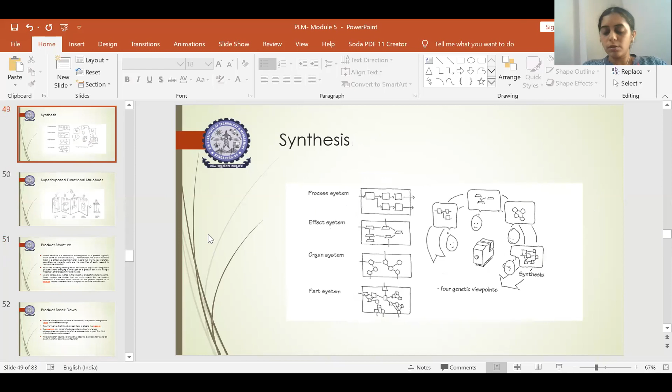In the last few sessions we dealt with structures, so I don't want to repeat all those. There were 4 types of structures we dealt with, with respect to the basic structure, synthesis, and function structures. We also dealt with what you mean by product structure, and how it is decomposed into different levels, which I explained in the last class.

Now all these will be focused on our product structure views. So what do you mean by product structure views? Product structure views are made upon several activity domains within the company. Within the company, each product you're going to manufacture will have different sectors, and every sector will be viewed and projected properly to see that it's working.

Due to the fact that not everyone in the company has to have a detailed overview of the product, several components with their attributes can be extracted. When it is a big company, many products will be going on, and not all people will have the entire information related to how the product is going on, how it has been performed, and how it has been operating.

This product structure view will give us the entire information regarding the product structure, what its structures are, how it is going to be synthesized, which materials are selected, which type of operations you're performing to get the parts, how it is assembled, where it is assembled, and inspecting the inventory and other workshop facilities, whether it is running, whether equipment is down, and so on.

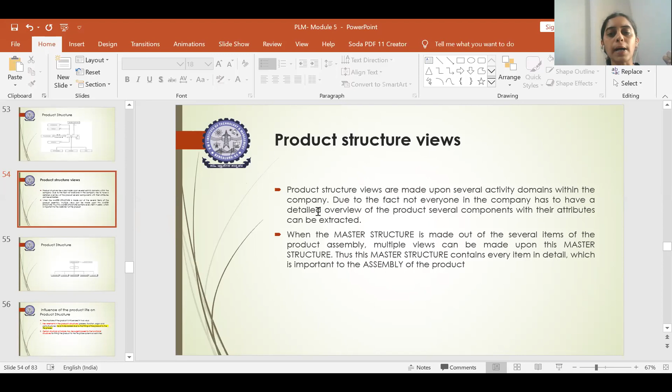For that purpose, the product structure will be bifurcated into many segregations. We call that the master structure, and that will be decomposed into different sectors. So you can see this is the master structure.

This master structure will provide the entire description of the structure of a product. It will be viewed into different sectors: the service sector, the design sector, the manufacturing unit, the purchasing unit, and the sale unit.

In everything, the product definition plays a vital role. Based on the product you are defining will be your project goal. Based on the project goal, product definition will be done. The goal is nothing but the need of the customer, and based on that need, the product definition will be done.

Based on that, the master structure will be developed, which will have all the substructures I explained to you: the basic structure, the organ structure, the synthesis structure, and the functional structure. Clubbing all those together provides us the master structure.

But clubbing all those together will not provide the entire description for the customer or layman who is seeing that structure. So it has to be bifurcated and projected in some way, and hence we call that a product structure view.

This view will provide us the entire clear picture about the product right from the initial to the end, that is, how good the serviceability of the product is. This will provide the entire description.

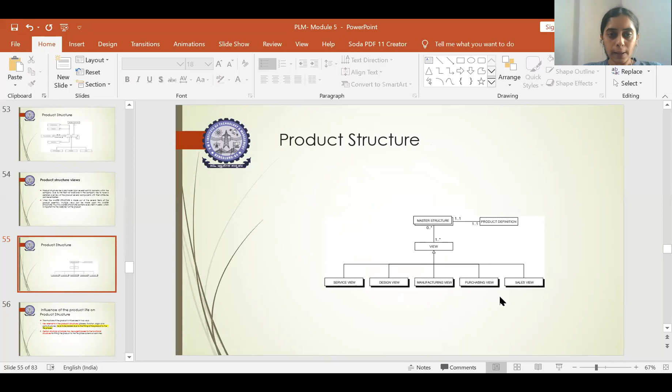So next is influence of the product life on the product structure. Until now, we were focusing on product structure and its view. So now you should understand how it influences its product life. Related to this, you have two ways in which it is influenced.

First, new elements in the product structure have to be added due to fitting of the product to the life phase. So if it is an existing product, and some modifications are added for the need of the customers, you're doing add-on into the existing products. You have to show which elements you are adding new. It could be some process elements, functional oriented elements, or organ structures, or specifically some parts which you are modifying, so you will have changes in the existing product as per customer requirements. This is one part in which it influences the product life of a particular structure.

Second, certain structural principles may be superimposed to the functional structures. We have discussed structural structures, organ structures, synthesis structures, and functional structures. Sometimes, some of the structural structures will be overlapping with the functional structures.

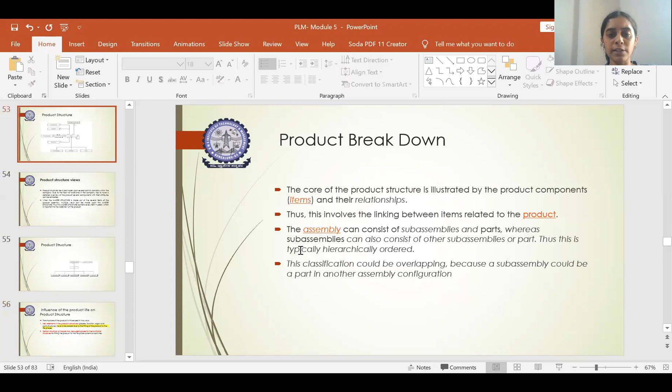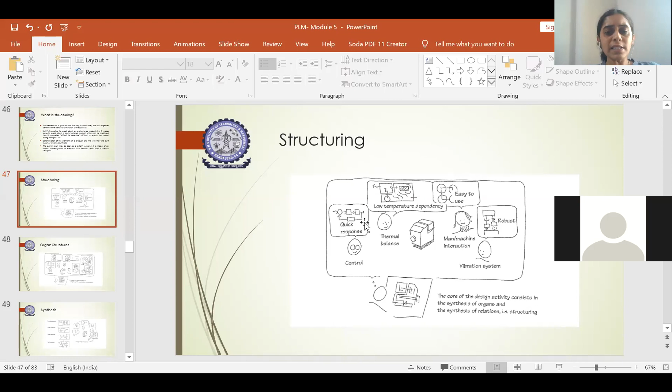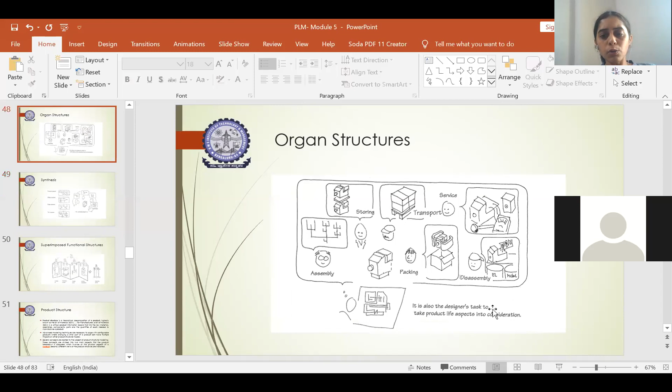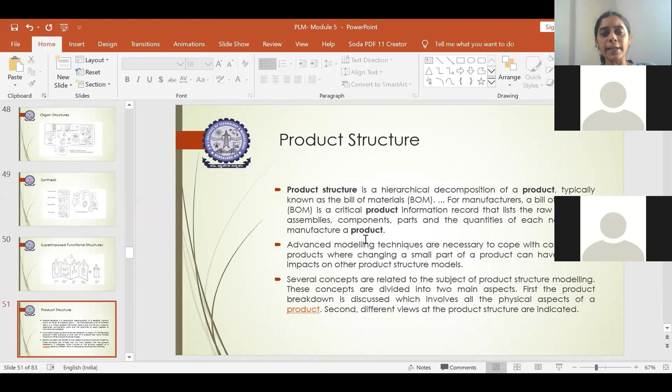So these are the two factors which affect the life cycle - one is if you are adding any new elements, and second, if the basic structural structure is being superimposed with the functional structures of a particular product. This helps to picturize the product structure view exactly, so they can identify what is being superimposed, understand this factor of structural overlap with functional structures, and identify the adding elements using the concept of product structure views. These are the two factors which influence directly our product life cycle.

When you add on elements, it helps improve the life cycle of the product, because you are modifying it when it's already in the market. This helps improve sales, turnover, and life cycle, so it affects our product life cycle. Second, when it is superimposed, if you analyze which factors are superimposed, it also helps increase the functionality of the product.

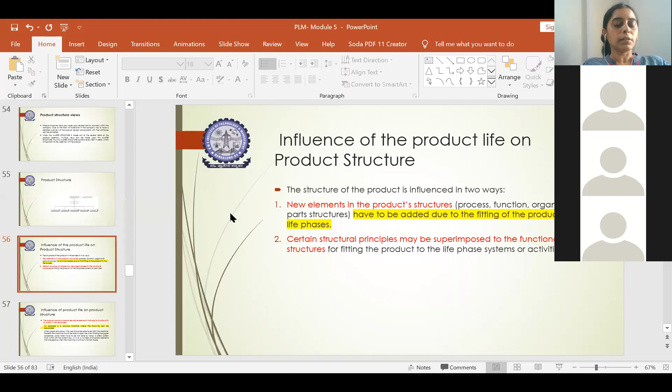I'll pass on the message related to this. Okay, you will pay for this. Wait.

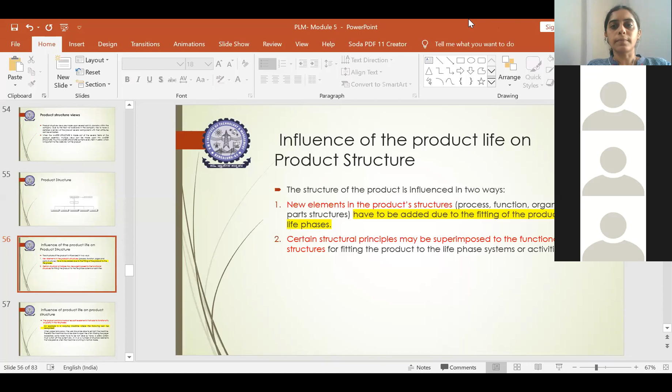So the third influence factor is that the product contains more or less active elements that add to functionality or quality in the life phase. What do you mean by it? The product contains less or more active elements, which could vary the functional aspect of a particular product or its life phase.

For example, a copying machine, or printer. Sometimes if the paper gets jammed, changes have to be made - you have to remove the cartridge, remove the paper jam, and insert it again. So this is one case where some machines, if you just give the input data, you get the output, with no more moving elements or less active elements. When there are more moving elements, like in a printer which has to move to get the printout, there will be some variations, some jerks or jams in between.

So it will be able to identify those issues. These are the third influential factor related to our product structure views, because in views, all the moving elements, all the varying active elements, everything will be pictured. When it could be jammed, everything will be segregated. So when they see a product structure view, they'll be able to identify when it can happen, and overcome the jamming of the paper sometimes. These are the three criteria which influence product structure views.

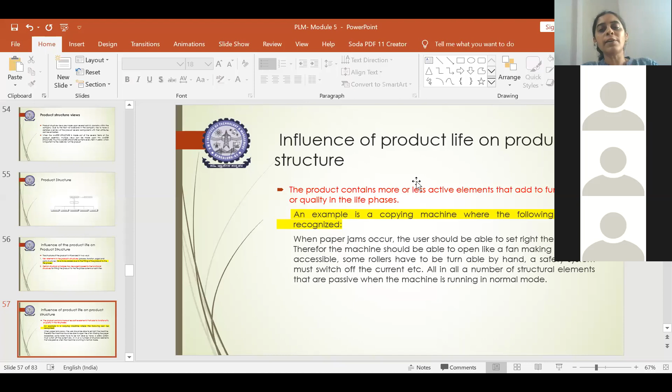Hello? Yes sir, mic testing 1, 2, 3. Hello?

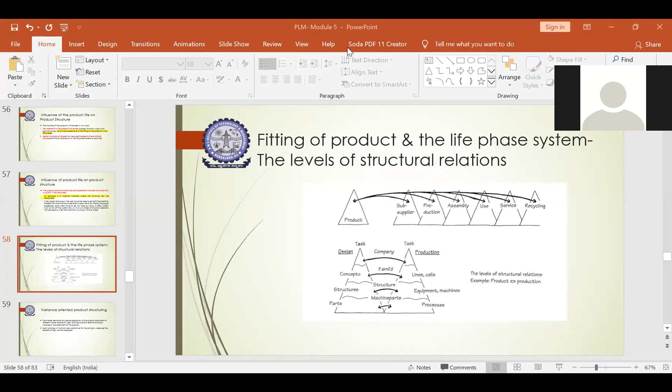Who is doing this? Kindly open your mouth.

It's like I'm speaking for myself. You read it for yourself. You'll come to know the pain you take for it. Okay, so no books are available for you all currently in the library. You learn by yourself and I'll see how well you will excel.

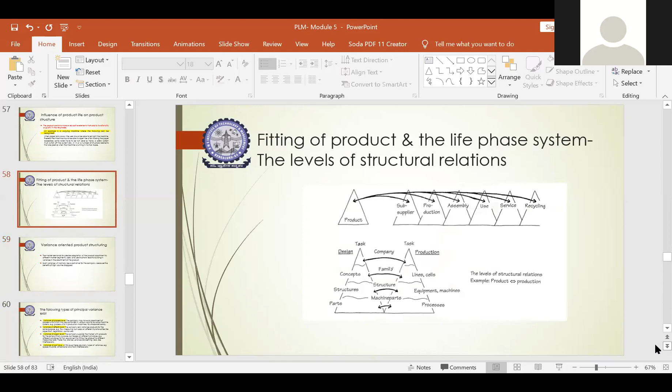So next we should know what you mean by variance oriented related to the product structuring. So variance is nothing but the varying parameters which will come across in a particular product. It could be a good variance or it could be a harmful variance. So you have to understand exactly what you mean by variance. The market demands precise adaptation of the product assortment to different market segments such as users and situations, leading to building in variance in the assortment of the product. So what do you mean by this?

So variance will normally be a cost driver for the company because the benefits of high volume will disappear. So variance, when a product is working successfully, if it is a robust design, you will be having many variations which occur with respect to the parameters you are using. So if these variants are disturbing, then you have to eliminate this variance without changing the input parameters. Then you call that a robust design.

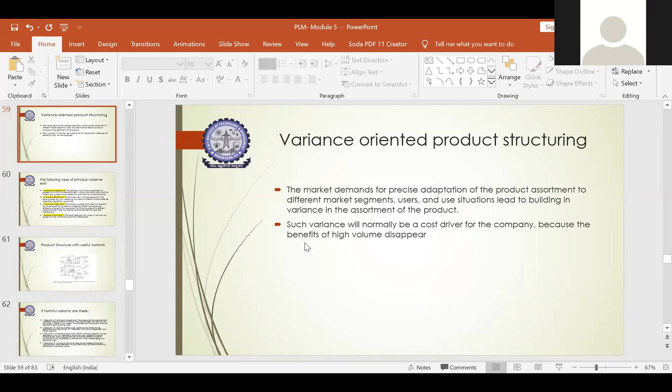So then, if you are overcoming variance, you are overcoming the harmful variance. If the variance you are getting is useful, then it could be in this way. So the variance could be at the process level, the effect level, the organ level, and the part level.

Process level is nothing but our synthesis structure. Effect level will provide the information related to the function structure. Organ level will provide us the information related to organ structure, and part level also will provide the information related to the manufacturing sector. So that part level also can come under organ level because the manufacturing of the part is also one of the sectors in our organ structure.

So what are the variants you come across at the process level? The company may have an assortment of process units, such as combinations of building and machine systems. At the process level, you might have more than one process type to synthesize a product. For example, process units in production machinery for chocolate manufacturing. There could be different processing units, and it will identify the variants that come during synthesis of a particular product, then optimize to get a better synthesis route to manufacture that product, like a chocolate candy.

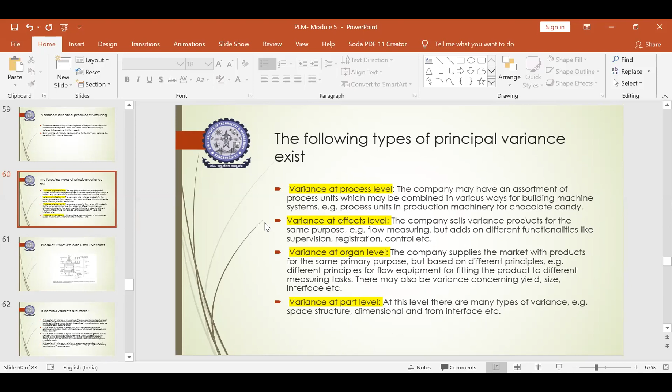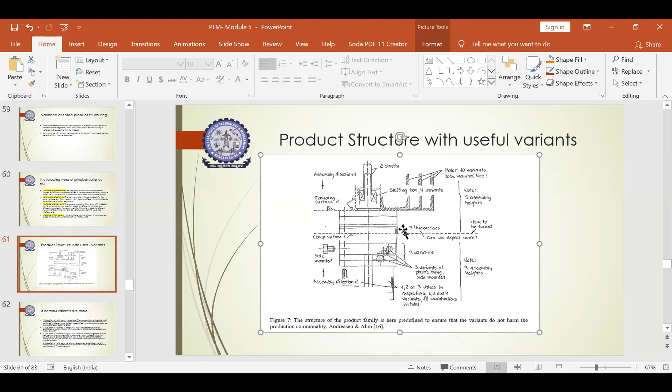Now if you see the image here, it is a structure of the product family, predefined to ensure the variants do not harm the production. It's a particular equipment here with different variants. This is the assembly unit, and this is the direction in which it's fitted. You have a shaft here, with 4 variants associated with the shaft, and again 3 variants related to the parts, and there are variants related to the valves also. All these variants are necessary to improve the enhancement of the design and the product. But if you have a harmful variant, it will disturb the entire product - these are the harmful variants.

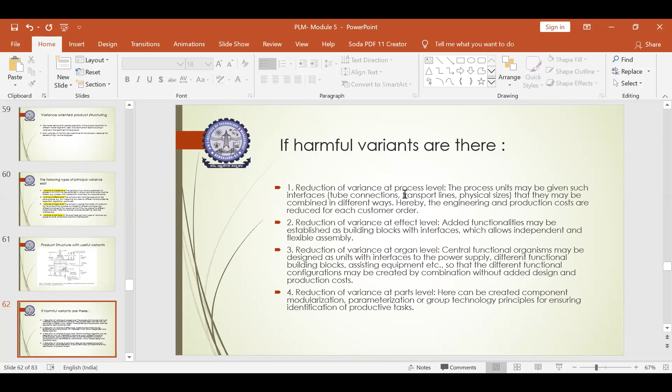Reduction of variance at process level. If you have harmful variants, you have to reduce these at the process level. These could be tube connections, transport lines, physical sizes which usually vary, and this has to be overcome. To do this, the engineering and production costs have to be reduced for each customer order. The process units may be given interfaces - during interfaces, if it's a part where tubes are connected, related to transportation lines, suppose they are making the tube...